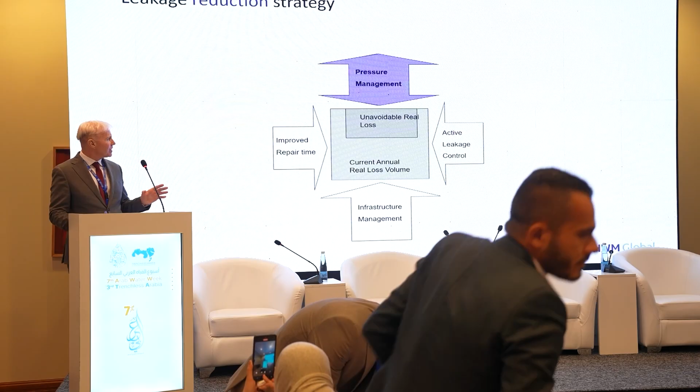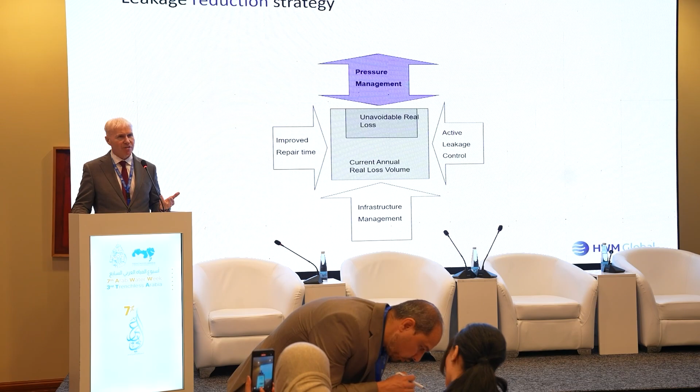I'd like to start with this slide about reducing losses in the network. We have 4 key components. Let's start with active leakage control. You have active and passive leakage control. Passive leakage control refers to customer complaints, say I have a leak outside my house, a burst pipe, visible leaks. When we talk about active leakage control, many leaks are invisible, so they don't come to the surface.

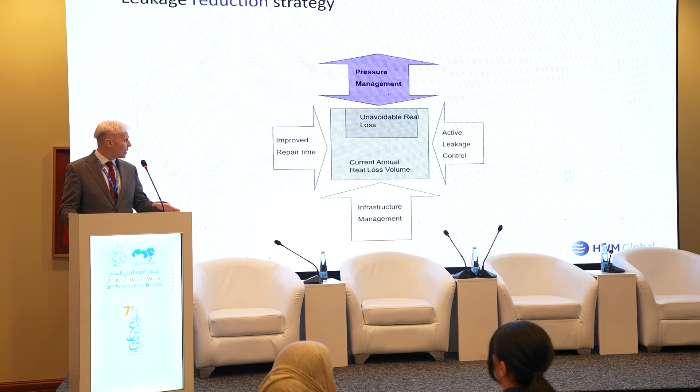You need to have good trained technicians with good technology actively looking for leakage in the network. And then, directly linked to this, is the repair of the leak. Make sure the workmanship of the repair is done well and on time, ideally within 48 hours. The whole buzzword in the leakage market today is trying to reduce the run time of the leak. The earlier we find the leak, the more water we will save.

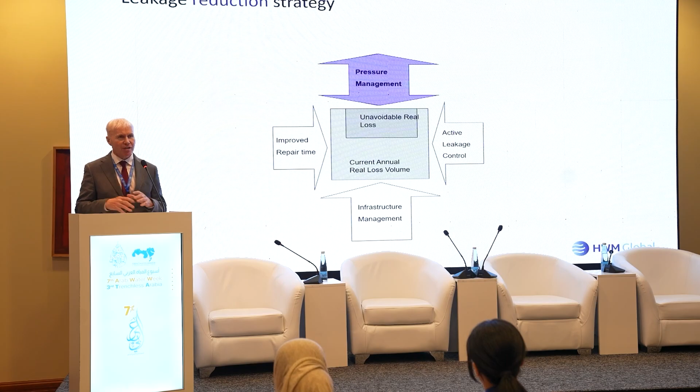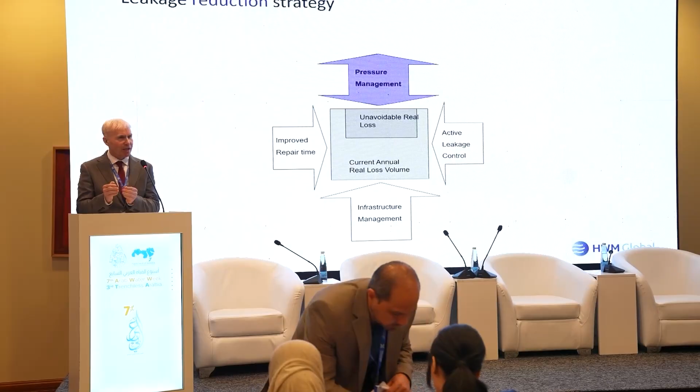Then we have infrastructure management. Obviously replacing the pipe, rehabilitation, is very expensive to do. But there may be certain parts of Amman, for example, where you're always finding leakages. So it may make sense to replace certain sections of the pipe, because it's always giving you headache with leakage. So this is something you can consider.

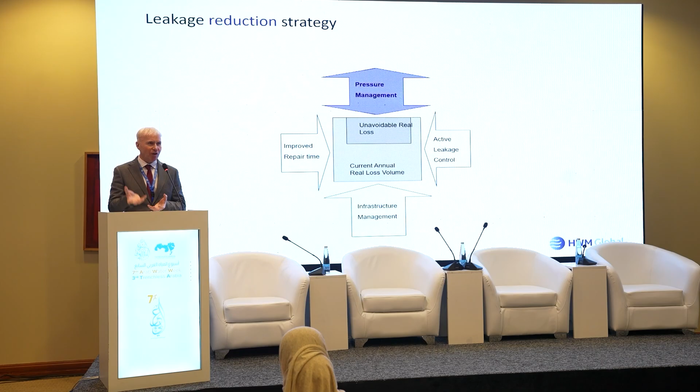Last one, pressure management. If you have a system, normally the relationship between flow and pressure is inverse. So when people are using the water in a 24-hour supply network, the pressure will drop. And at night time, when the flow drops, the pressure will increase. When you have leaks in the system, as the pressure increases, your volume of leakage will increase. So this is exactly what we don't want. We have some technologies which can help avoid this situation.

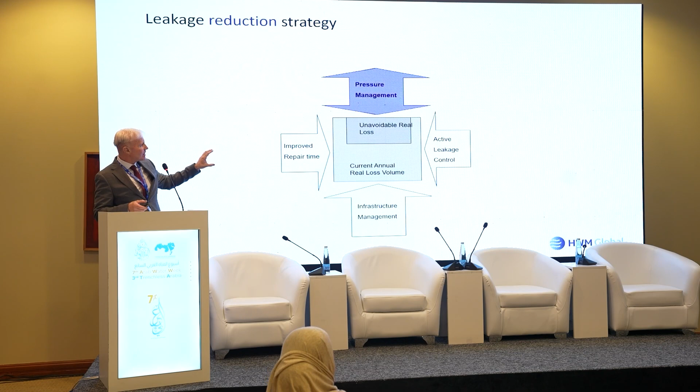But if we spend time or effort in any of these four components, we will reduce the annual loss of leakage in any system.

Typically, the technology that I'll be speaking about today can work in open networks, meaning without district meter areas. However, if you do have district meter areas or zones - we call them building blocks or smaller areas, typically between 1,000 to 5,000 properties - it enables the end customer to monitor each of the DMAs individually and then focus on the district meter areas which are giving you the most headache with regards to leakage.

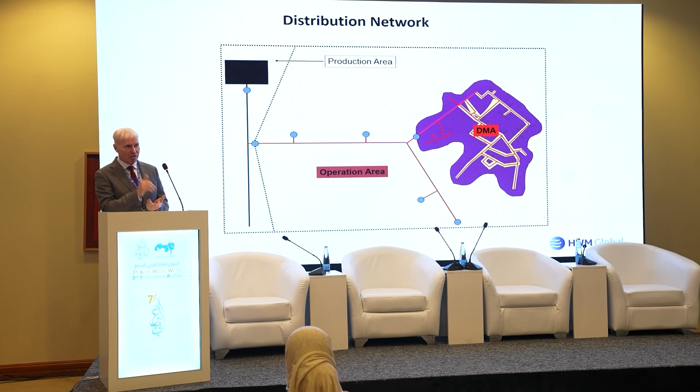So what we need to do next is monitor the behavior of this zone. And we do this by connecting data loggers - telemetry data loggers for pressure and flow - to the bulk meter at the inlet. This will give you a profile.

It looks something like this - this is like a 24-hour supply network. It looked very different in an intermittent supply network, but typically there's high demand in the morning, the flow drops off, and then at night time, you can deduct the factory usage. So the rest, the night flow which is currently always running in the background, is your leakage. So if you have 100 DMAs, and then you look at maybe 10 of the DMAs with the highest night flows - these are the ones you need to work in.

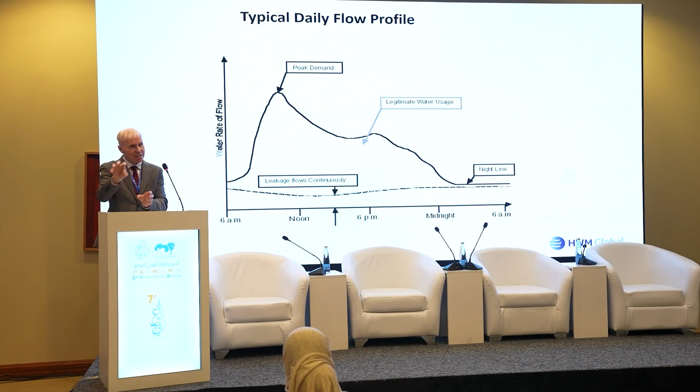So at least it's giving you critical information on where to start. You're not working blind.

We call it a 5-step strategy for finding leakages in the network. Create the DMA - which I believe in Jordan they're quite advanced, many cities are advanced in this step, so that's a good start. Then identify the leakage area based on your DMAs. Then we need to find the leaks in the network. Confirm the leak, and then repair.

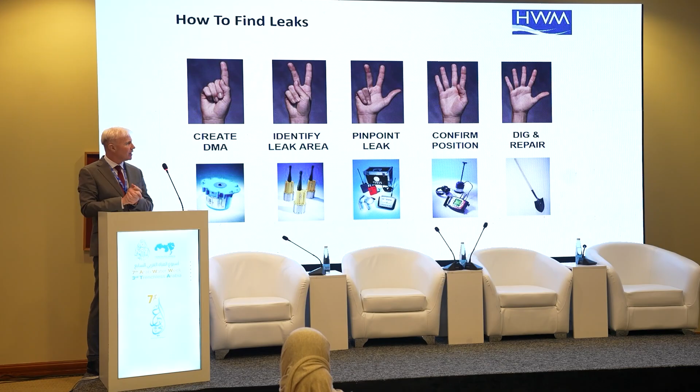Most of the technology that I'll be talking about for leak detection today is acoustic technology. So once the dig and repair happens - the final stage - it's important that we revisit the site, because if you eliminate this leak, the technology is always picking up the leak with the loudest intensity. But there may be a second leakage on that pipe.

So you always need to revisit that section just to double check that you don't have a second leak. The second leak will actually be larger in volume because it is quieter than the smaller leak - it's based on sound, yeah.

So having permanent deployment of technology, of sensors, helps you with finding leaks and reducing the runtime of the leak very quickly - finding the leaks when they're very young.

So let me just take you through some of the technologies that we have. For the DMAs, for the monitoring, we have a range of telemetry data loggers. We have portable loggers, but you have to go to site, program the logger, and download the data maybe in 3-4 months, so you could be missing critical information. The market has moved to more telemetry kind of online systems that send data 2 times per day, with a 5-year battery life.

These loggers can be installed in chambers, IP68 compliant, so that means if there's a flood in the chamber, the logger is protected and can still send data. And then you have alarm thresholds in the software end.

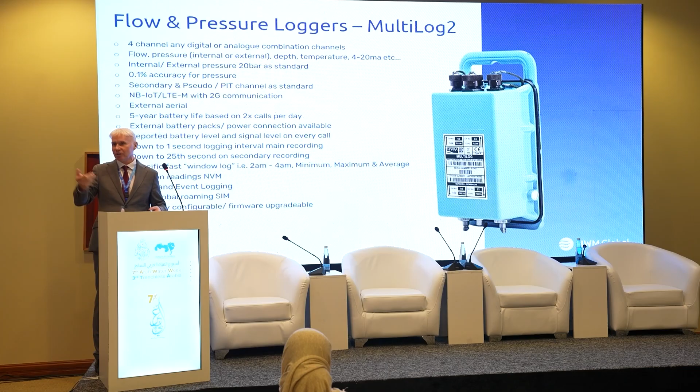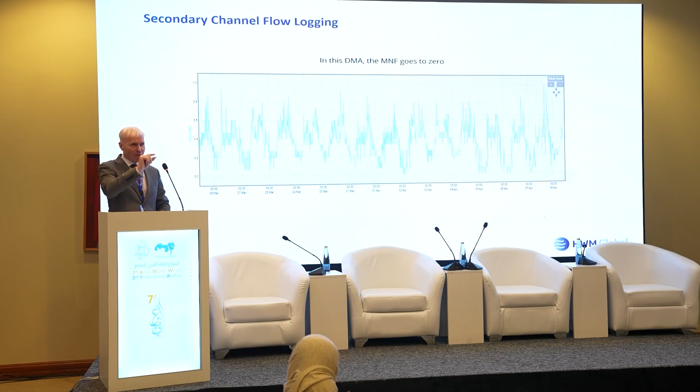I will send my leakage detection people to the site to go find some of the leaks. But we switched on the fast channel logging, and we established in the same area, same location, same graph, but faster sampling, we noticed that some of the flow readings hit 0. So by definition, if the flow ever hits 0 during a sample period, you can never have any leakage, because the leakage is always running in the background. So you would have sent technicians to site, but by switching on the fast secondary channel logging, you then can discard this site as not necessary.

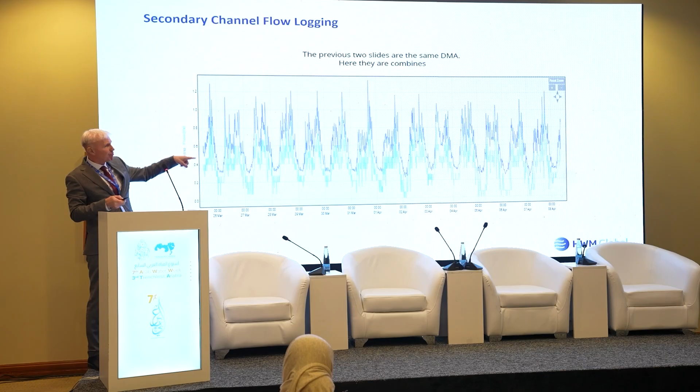So this is just superimposed on the same graph. You have the average, and then you have the more instantaneous reading.

So that's useful. Also in the logger for pressure transients, which we call water hammer, can happen very close to like a pumping station. So they happen very quickly, and a standard pressure logger will not pick up these water hammers. So you need very fast sampling, which typically can be 25 samples a second or 100 samples a second.

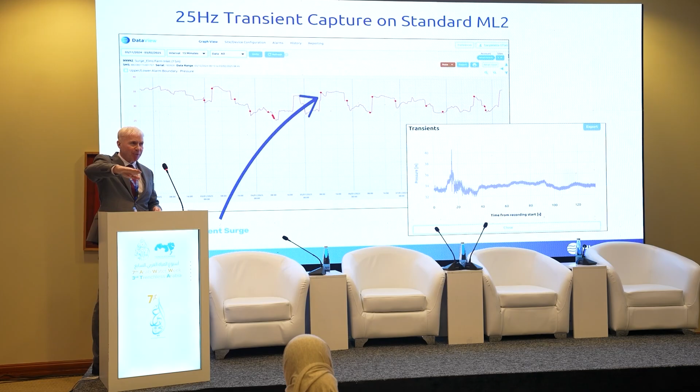Then you will see these spikes here, which can do huge damage to the pipes, can burst the pipes, but you don't know they're there. So you put the logger there, you switch on the transient logging, and then you can maybe reduce the speed of the pump to make sure these water hammer events are reduced.

We have a hosting platform which can be installed locally on the local server or cloud. So this is available for all our suite of products, for leak detection, for data loggers, and for pressure management. So once you install the technology, we call it fit and forget technology. That means that any changes you want to make to the logging or recording time, you can do it remotely. So you don't have to send people back to site, because it's using basically 4G or NB-IoT technology, and the communication is two-way.

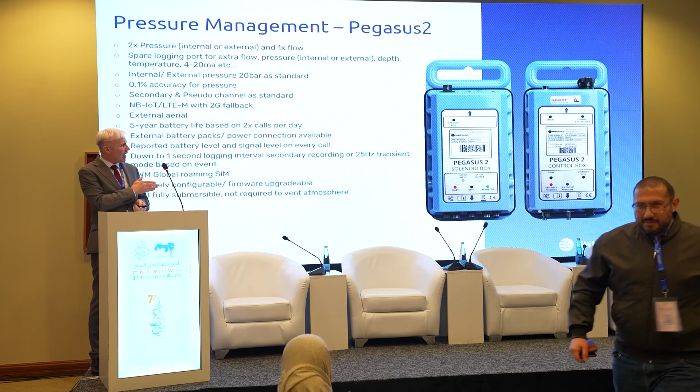So pressure management, as I explained, has an immediate impact on the volume of leakage in your system. Our pressure controllers work with existing pressure reducing valves which are installed in the network. So the advantage of this product: 5-year battery life, autonomous, 4G technology, 0.1% pressure transducers for accuracy, and again, it's for control of the PRV.

So here's a typical installation. The pressure reducing valve is installed because the customer is concerned about high pressures, so they install the PRV. The advantage is to reduce the pressure for this PMZ, for this pressure zone. But what you have to do, you see the pilots, they have to mechanically fit the pilot and the screw, and they have to fit a setting that satisfies maximum demand, which is during the day.

But what happens at night when the flow drops off? The setting of the PRV downstream is the same, so the pressure will still be high. Less than before the installation of the PRV, but still more than is required.

So this is where we come in as a manufacturer of the pressure reducing controller, and we use basically a hydraulic actuator which works in conjunction with the existing pressure reducing valve pilot, all brands of PRVs. So we are generic, we will work with any. We basically have our hydraulic actuator, which is the same thread size as the pilot. We set maximum and minimum pressure, so it can never go beyond these 2 points.

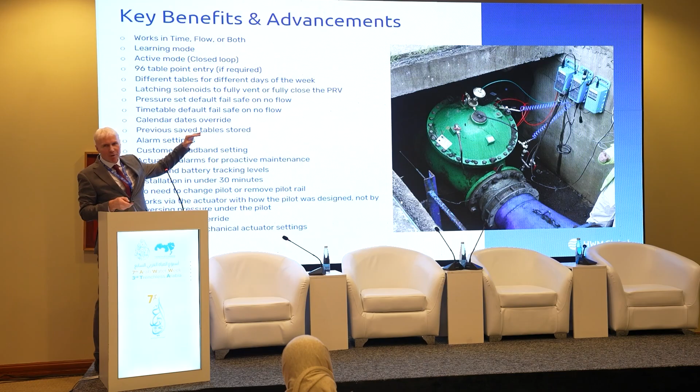So everything is battery operated, all IP68, so no problem if the chamber is flooded. The only thing that needs to be above the water is the GSM antenna. If this GSM antenna is below water, then maybe it will not send the data. But if for one day it misses the data, it will send the data the next day. It also has a backup table in the controller which will automatically back up the data and control the valve in case of non-communication.

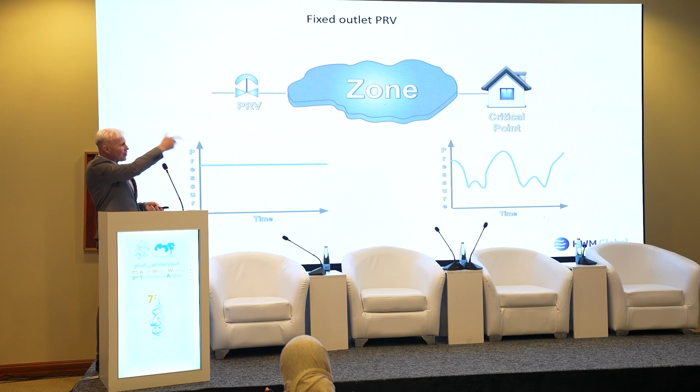So this is the typical installation on any PRV, and this is our standard PRV installation. You have standard fixed outlet pressure, and then your critical point is changing. So at night time your pressure will be high, which will increase the volume of leakage. We want to change this behavior, so we install our controller at the PRV, and we do the opposite. We control the valve, and now we have a very low minimum pressure at the critical point. This makes sure that this paying customer is always getting the minimum required pressure 24/7.

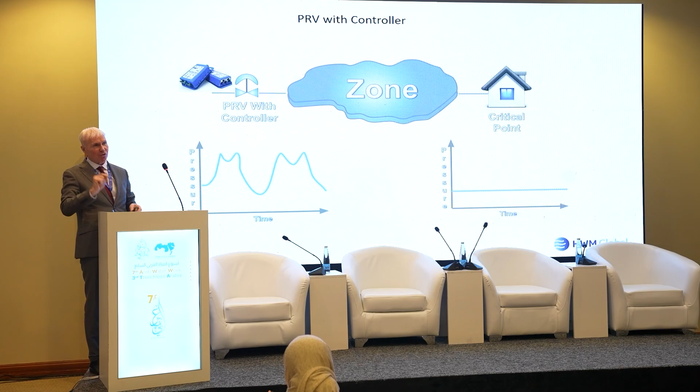The advantages of pressure management: apart from saving water and reducing the volume of leakage, the pipes will last longer because there's less stress on the pipe. The pressure is a smoother system, so less changes, less variations, so the pipes will last longer. Better customer service, and the volume of leakage lost will be reduced. Your leakage is still running, but the volume of leakage is less.

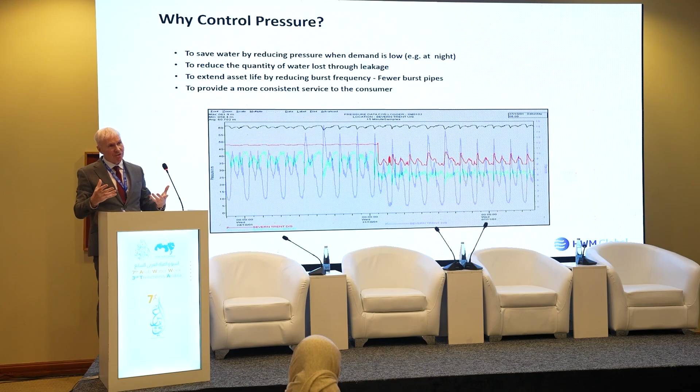But the leaks are still running. So now we have to find the leaks. How do we find the leaks?

I think it's time for my voice to have a bit of water. Can everyone still hear me okay?

So leak detection, we're the world leader in this field, finding leaks. We need to know where to go. This is the final stage, the leak ground microphone, this is the final confirmation stage. It comes with headphones, elephant foot filters. Depending on the pipe material you're working with, if you're working on a plastic pipe it has plastic filter settings, metallic pipe has metallic filter settings. It also comes complete with an app.

You can load the app on the phone and pair it with the central unit. The advantage of that is you can send audio files from the leak site. If you have, for example, a leak detection technician who's new to the job, he's had a few weeks of training and he's not sure where the leak is, whether it's here, this location, or here, he can take a file and send it via the app, via email, or if they have the software installed on the server, the leakage management guru technician can listen from the office and give his recommendation of where the leak is and feed back to the technician.

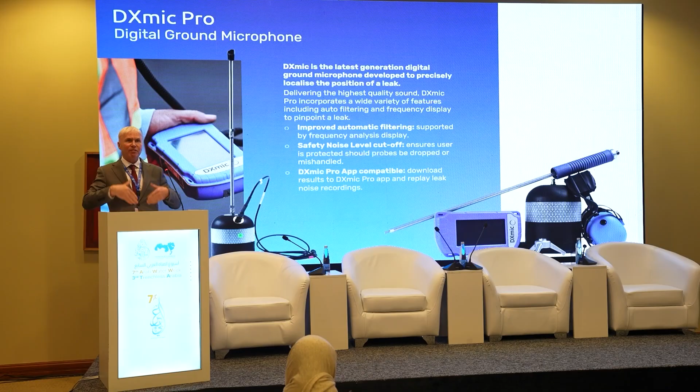So it builds up a profile, and also tells you how many leaks you've been finding in a certain period of time. So it may say you found 12 leaks on the same section of pipe. I think it's time to replace the pipe, because you have this documentation and this history, okay? So that's the confirmation.

Correlation is to pinpoint. So this technology goes onto valve fittings. Typically every 250 meters you put a sensor, you put in the diameter, the distance between the two, the material, and it does a correlation. Basically, it's picking up the time difference of the leak arriving at one sensor compared to the next. So it's using time delay.

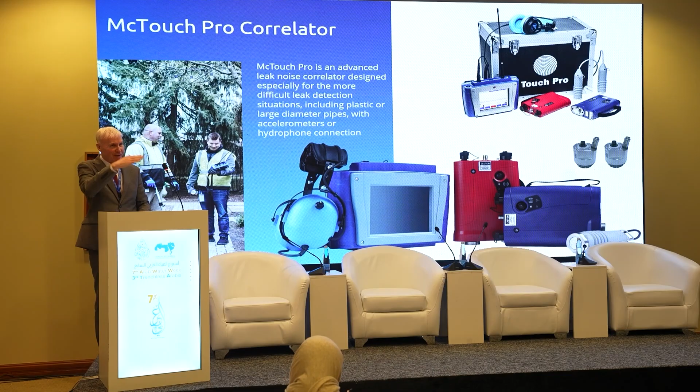And then it will give you a position of the leak, which will basically be a graph with a peak in a fixed position, because believe it or not, the leak doesn't repair itself and it never moves, okay? It's always there. So if it keeps moving, then it's consumption. It's not leakage. The leakage always stays in the same place.

So let's move on to the acoustic technology, because this has really changed the market for water utilities, okay? Because this can work in open networks, but also in hotspot DMAs. We won the Queen's Award for Innovation back in 2017, which is a prestigious award for manufacturers.

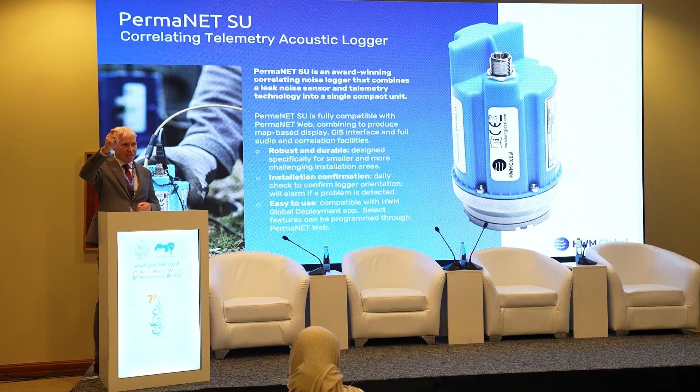So basically inside the logger, it has a magnet, a SIM card, a leak sensor and antenna. It will log between 2 and 4, and then at 4 a.m. finishes recording, and it's listening for consistency of noise, constant noise over time, okay? And then it will also make a 15-second recording and send this data to the online server. And then you will get a list of priorities of where your leakage is.

Here, I don't know if it will work, but if you have a sound file, you can listen and you can hear a clear leak noise.

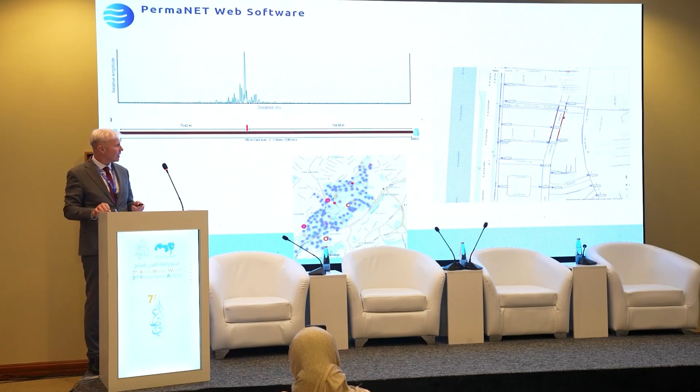How long do I have, like 5 minutes? Probably this. 4. Okay, let's call it 4.

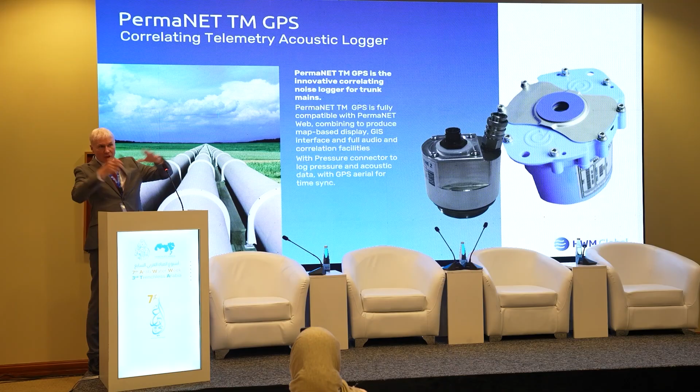So there's a typical leak peak, okay? Then we have large transmission lines, so larger diameter mains. We pick up noise traveling through the water. So the first technology was across the pipe. This one is in the water column for large transmission mains or plastic pipes.

We've also introduced AI, artificial intelligence, with our noise sensors, using a spectrogram. This really reduces the number of false positives, because leakage is not the only constant noise. You have other noises like PRV noise, pumps, transformers, and we can reduce the number of false positives now by having AI inbuilt.

Final few slides now, just on wastewater networks, in case anyone is involved in wastewater. There is now huge investment in wastewater networks. They're really concerned about the environment and pollution and spillages of the wastewater network. So we have a range of products, again 5-year battery operated, and they are monitoring these manholes in the sewage network. What we're trying to do is to avoid the spillage.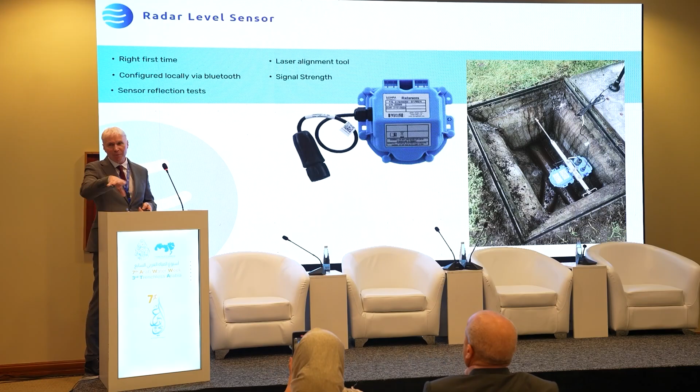UK companies are hit with huge fines for these spillages, but around the world, especially around the Gulf, they're investing heavily in this kind of technology to permanently monitor the wastewater network. Wastewater parameters, water quality, different parameters we can monitor, all in a battery operated system, 5 years.

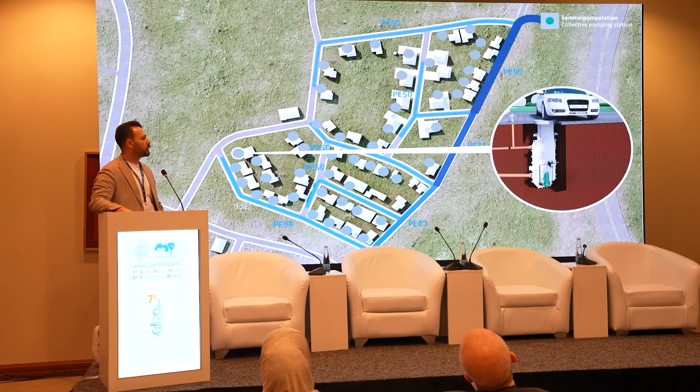But unluckily, this is not the case in all countries and situations where you have different altitudes. People are sometimes living in valleys, and the wastewater treatment is not on the same level or below. Maybe it's at higher elevations, and we have to pump it one time or in series with different pump stations. So today I will be giving you a quick overview about us, and the application of the Wilo solid separation system, which is used in the collection and transport of wastewater. What is it exactly? Functionality, configuration, the range, and your advantages.

So to start about Wilo. Wilo is a German company and one of the world's leading premium providers of pumps and pump systems for building services, water management, and industrial applications. We move water in an innovative, efficient, and climate-friendly manner. We work hand in hand with our customers to really understand their pain points, work on each specific case, and provide them a custom-tailored solution which meets their requirements and overcomes the challenges.

So we moved from improving hydraulic efficiency, overall efficiency and reliability of the system, but now recently we are more in a digital approach, where those pumps are smart enough to monitor themselves, to protect themselves from blockages sometimes in wastewater, and even control other pumps. It is smart and digital.

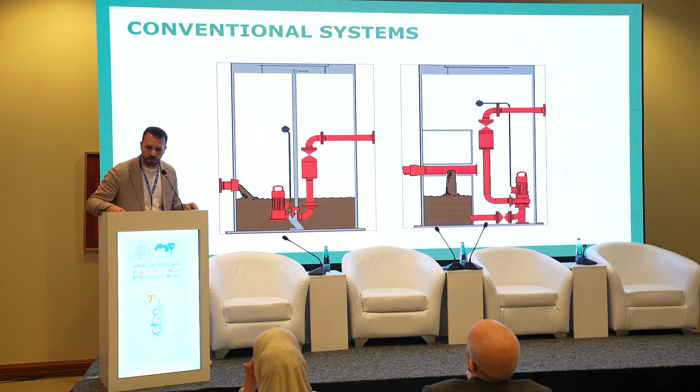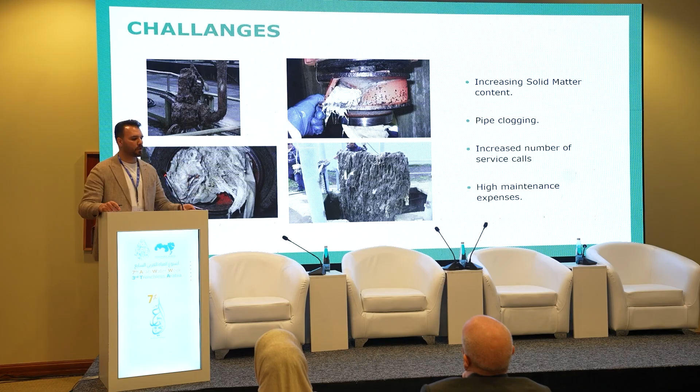But usually you find lots of challenges in this application that you don't expect, especially in the lifting station: the solid matter content inside the medium. So you can find rags, papers, diapers, everything you can imagine. And there is also increasing solid matter in the wastewater. Pipe clogging, you have an increased number of service calls and cleaning. Plus, it's not hygienic, it also smells.

So our solution, solid separation, works well. It's a complete turnkey solution. The system is plug and play, a turnkey solution for collection and disposal of the wastewater. It comes with all the fittings and valves, pumps, collection tank, control panel, to be fully in operation. So in the inlet, you have a distribution chamber.

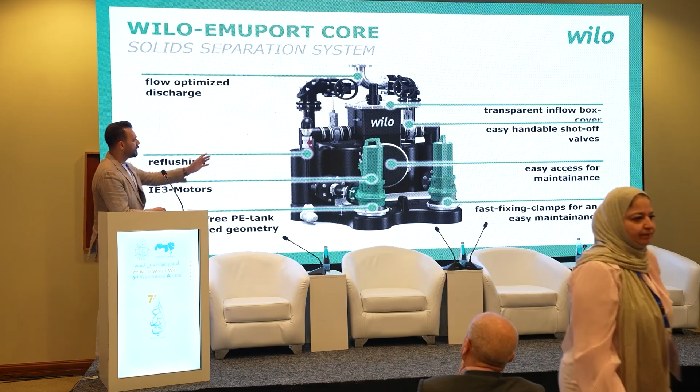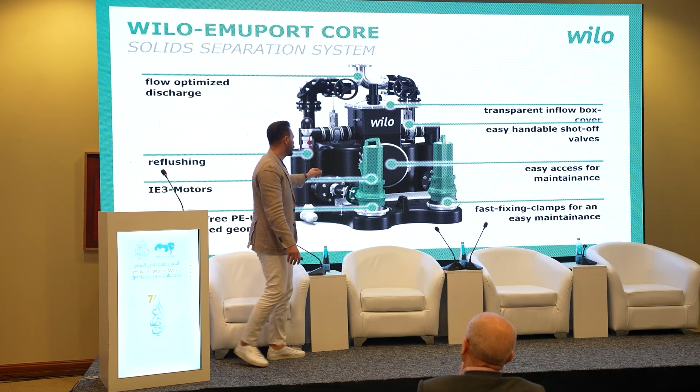This is the transparent chamber where the inflow is divided into two solid separation tanks. In these two solid separation tanks, the solids or particles will be retained inside by means of a screen. And then only screened liquid will pass through the pumps to the collection tank.

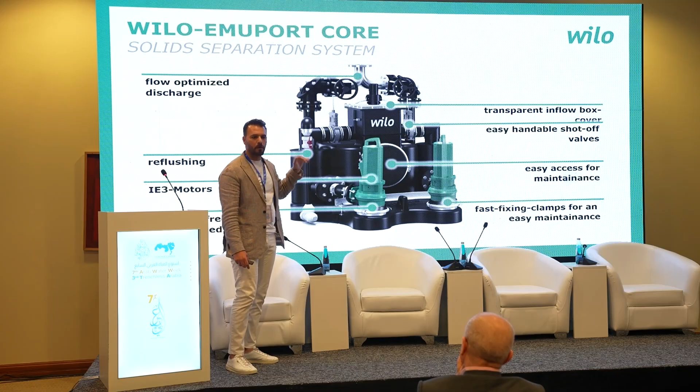And then when the tank level reaches a specific limit, the pump will start and take the screened liquid, pump it directly into the solid separation tank, and then flush all the solids retained inside directly to the discharge.

So, I'm switching around, should I point here?

So just to break it down, that one is, let's say, the demo or the small size of configuration, which can be used in residential, commercial application, and small capacity lifting stations. But we have also different configurations which I will show you. Here is a cross-sectional cut.

The inflow will come. By screen, all the solid matter will be retained in the solid separation tank. Then screened sewage will pass through the pump to the collection tank. By this, you can actually use small ball passage pumps, because the solids are not passing through the pump or even reaching the collection tank. So less sedimentation and settlement inside the tank, less cleaning of the collection tank, and less plugging for the pump.

And whenever you are able to reduce the ball passage of the pump, you can go with a different type of impellers that use, let's say, a small ball passage and enclose the flow in an efficient way. Pumps that have a smaller ball passage usually also have a high hydraulic efficiency. And this is the economical advantage, by selecting a more efficient pump to pump the sewage.

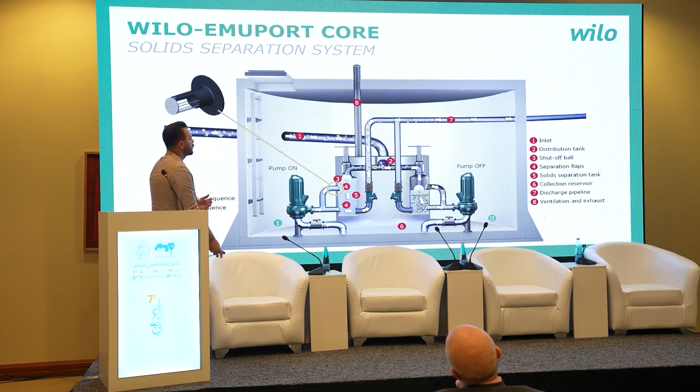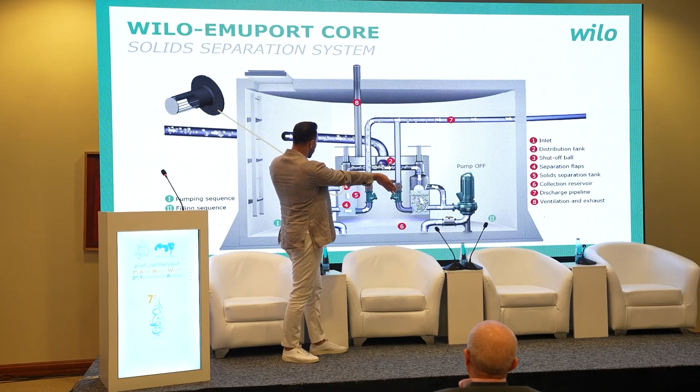And also a bigger configuration of the FG system. This is the same principle, but it is all put together. This is the inflow, number one, distribution chamber. Then the flow is distributed to two solid separation tanks. This pump is in filling process, while this pump is in pumping process. So let us imagine that now this is filling.

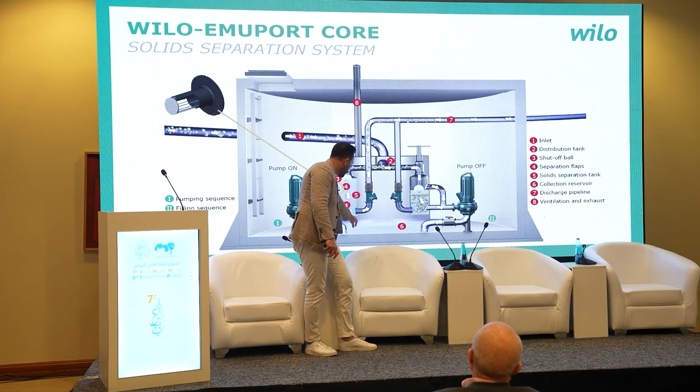The water will come from here, will reach this limit, and inside the collection tank as well. So both tanks are full of water, and two big shut-off balls will close the inflow for just milliseconds. One pump will start, let's take this one, take the screened sewage from here, flush the tank directly to the discharge, and then the second pump is intaking. This is only milliseconds, so it's a continuous inflow.

To have it in a more clear way, I have a demo video, maybe you can turn it on, to walk through it. Yeah, so the process will start from the inlet. I hope it's working.

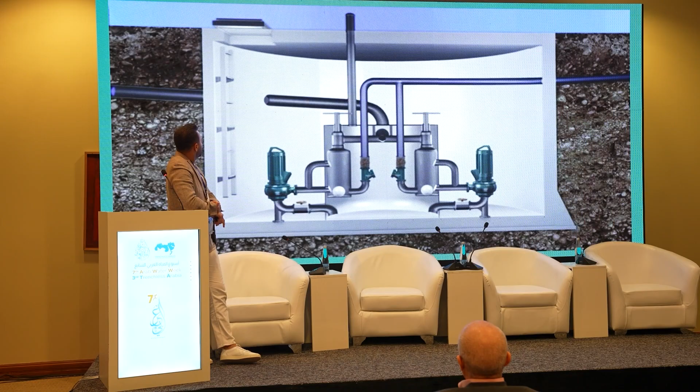Yeah, so the sewage is flowing from the inlet, distributed into two solid separation tanks, then the shut-off balls rise to close the inflow for seconds. Screened sewage is passing through the pump and filling the main collection tank. This is only a stop of milliseconds. Now the pump will sense that this is a high level, that pump will start and flush the solid separation tank directly to the discharge.

And this is continuous intake. The second pump is intaking now, filling the tank. In each filling process, the air is pressed out from the collection tank through a vent pipe. So it's also gas tight. There will be no smell in the sewage pump station whatsoever. The gas is enclosed inside and pressed out from the collection tank directly to the vent pipe, or sometimes, if it's a residential area, you can install an odor control unit for the treatment of the air.

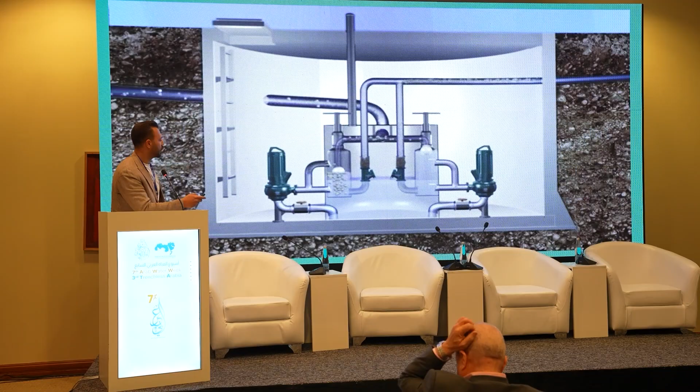So the economical advantage, as I said, you can select small ball passage, high efficiency pumps in the sewage application. Even if you have a particle size of 100 millimeter, you can use a pump with only, let's say, 80 millimeter or 50 millimeter ball passage. And then you can save more. So this is the FG design of the solid separation system.

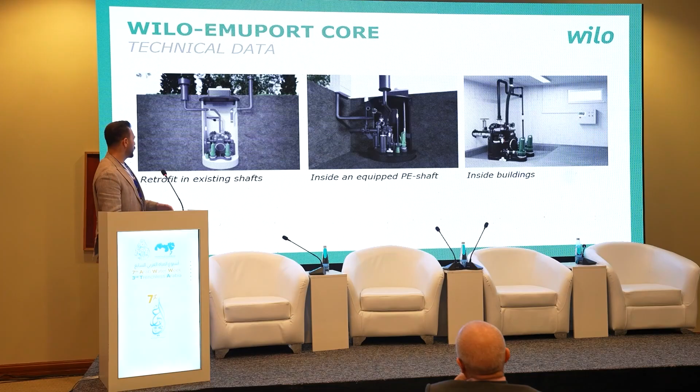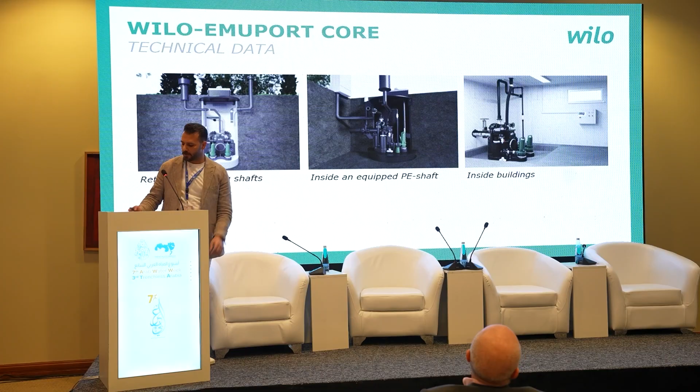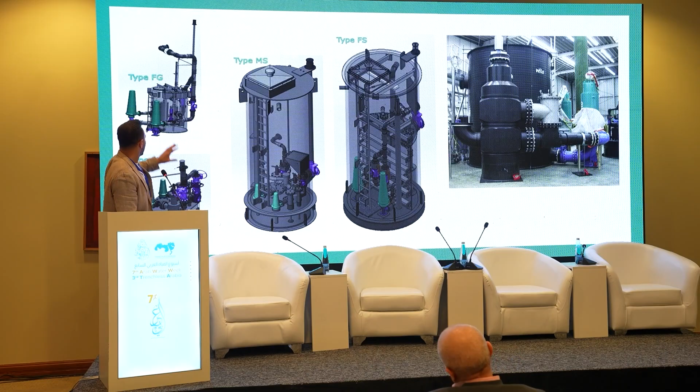Configuration and range quickly. The pumps can be installed in an existing shaft, or in a new PEHD shaft. We fabricate as well the PEHD, polyethylene high density, shafts, or inside buildings. So it looks like this in different applications, because this is quite a customized system, depending on the installation and the space available. So you have ground installation or shaft installation.

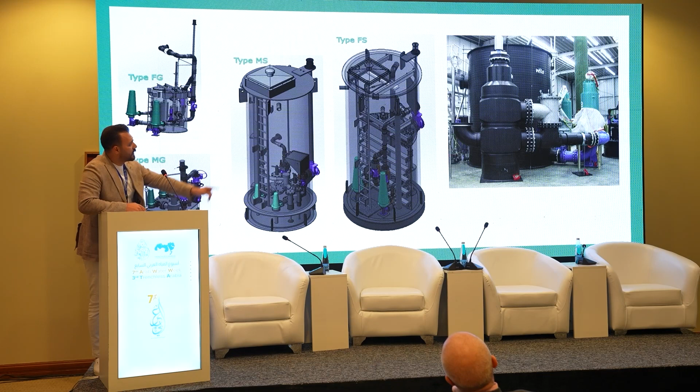It comes with all the accessories, the collection tank, the ladders. We just have to dig the hole and we can do the remaining job. And that system is actually the biggest that we have produced, of 1,200 cubic meters per hour inflow to the station.

So we usually ask for the inflow, we ask for the discharge profile of the pipe, how much is the static head, how much is the dynamic, and then we select the collection tank capacity, we select the pumps suitable for this, and we give you the design drawing to prepare your sump.

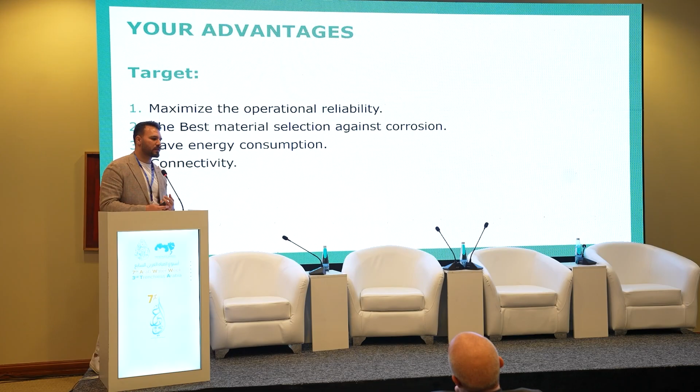So your advantages: maximize the operational reliability, and then we have the best material selection for this application, save energy consumption, and, let's say, the product connectivity and how much it is digital and can be monitored on dashboards and all.

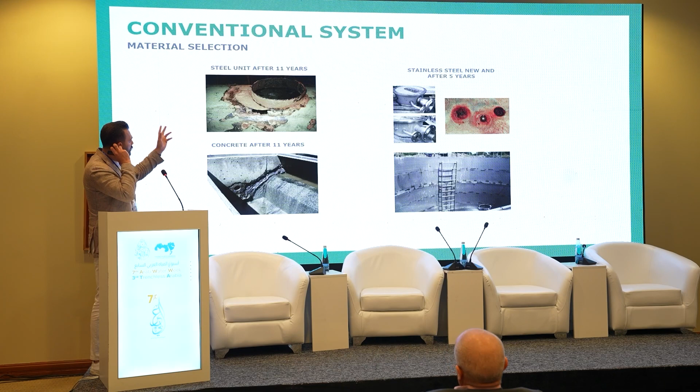So about the material for wastewater collection pump stations, you usually see concrete or stainless steel. Now you can see some pictures here of steel pipes, concrete channels, stainless steel shafts used in sewage application after a number of years, and how much this aggressive water or the sewage will impact it. Even if it's stainless steel, on the anchorage you can find some corrosion there, even if it's a bigger investment. We use high-density polyethylene.

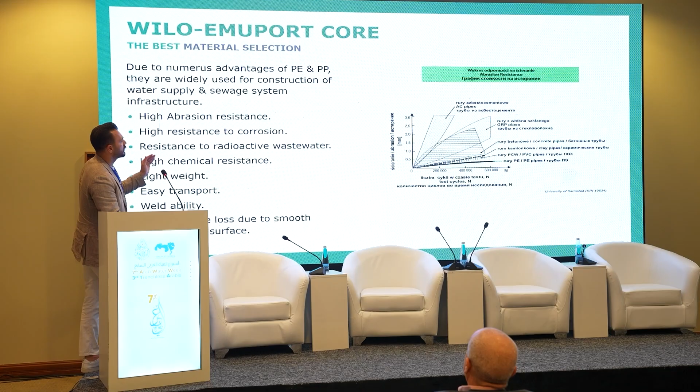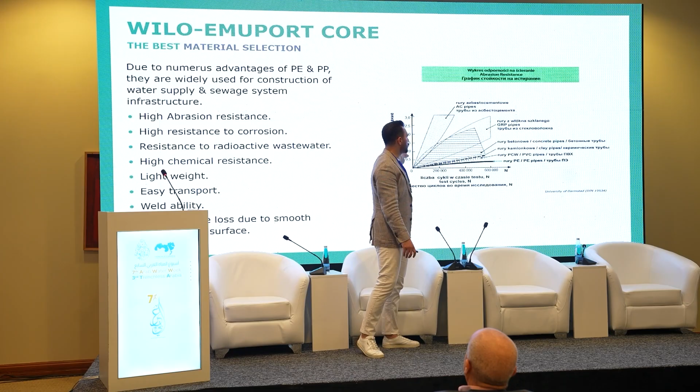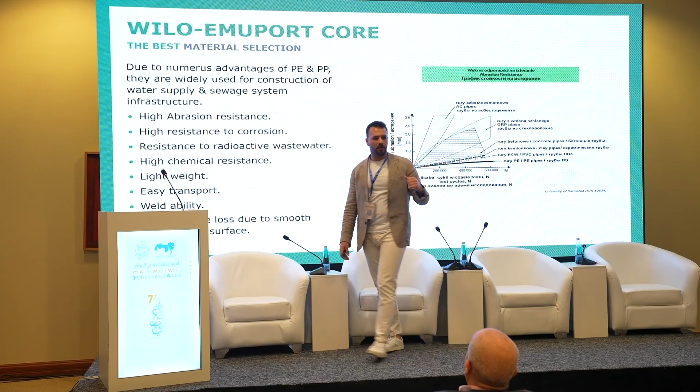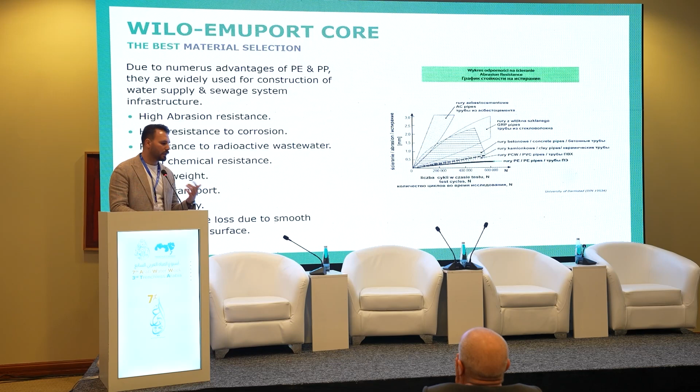This is a chart from the University of Darmstadt, where you can see different materials and the life cycle cost with, let's say, test cycles with the abrasion in millimeters, comparing AC pipes, GRP pipes, concrete pipes, clay pipes, PVC pipes, and the PE, high-density polyethylene. We can see it has the lowest abrasion in millimeters compared to the other materials. It is also very lightweight. Weldability is also possible. Wear resistance, easy transport, and many other advantages from a material point of view.

This is an example of a pump station in Lauter, Germany, where we replaced an existing pump station. We were having a 110 kilowatt pump with a 100 millimeter ball passage, because as I said, with a bigger ball passage you need a semi-open impeller or open impeller, non-clog single channel to pass these solids. When you go with a smaller ball passage, at 80 millimeters, you can go to 98 kilowatts. And we fitted a multi-channel impeller with the smallest ball passage of 50 millimeters, and then it reduced the power to 87 kilowatts.

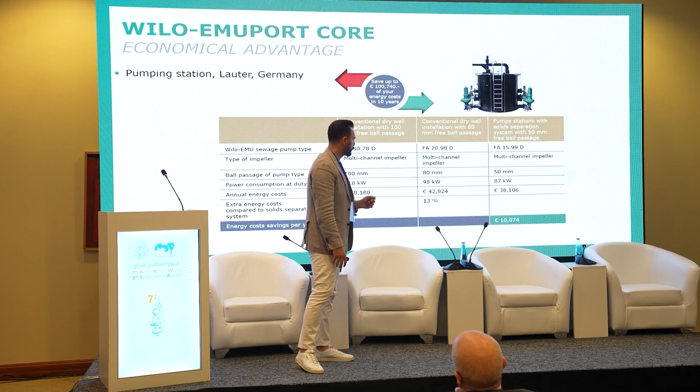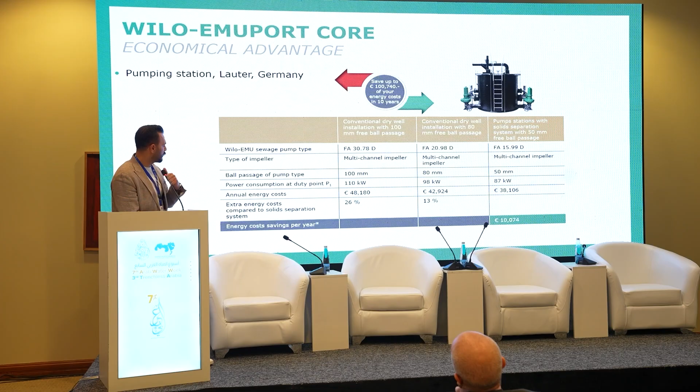So it allows us to go with a more enclosed design of the impeller because the solids will not pass through. And this is the calculation of a 10 year ROI, but this is based on the energy consumption at that time. I think it's much less now because the energy rate is much higher.

Some success stories quickly in Dubai. I personally worked on this project in metro stations with RTA, Road and Transport Authority in Dubai, where they were facing, especially in the underground metro stations, a big challenge of clogging inside the pipes for the pumps. They were investing a lot in cleaning. I think the operator there was Serco, also a well-known company for operation. And this was a problem that they could not actually solve, even with macerators.

Because macerators are used sometimes in sewage to cut it into fine particles which the pump can take, but it depends on the content of the solids. So, for example, tissues, papers, rags will all accumulate inside the pump and the pipes. And after some time it creates a tissue wall, as it's called, and then it will also clog. So that solution was also explored by them.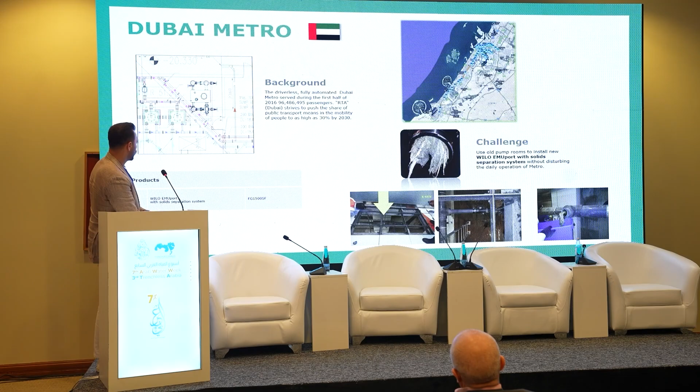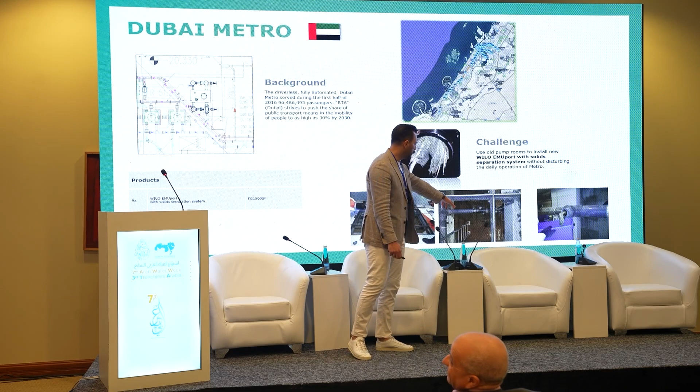Based on the available space, it was very challenging to get the pump inside the wastewater plant room because there was a very small access in the metro station down to the pump station. And you can see here some pictures from the flooding. So we customized the system with a collection tank in a rectangular shape. You can see the shape is fitting the accessibility and the space available in the pump station.

We installed a dry-installed pump there with the solids separation system, and the return was actually in less than 2 years because they were paying a lot for cleaning and shutdowns of the station, etc. This system can also be monitored by smart gateway and our smart controllers to the cloud, and you can stay connected with the dashboard or even a smartphone using the Wilo-Assistant app.

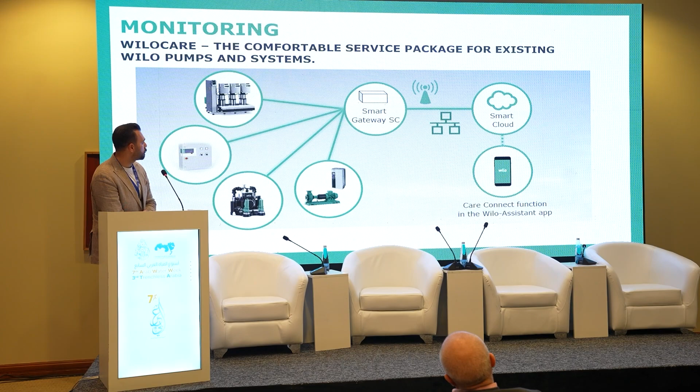So I have just one video of 30 seconds, I believe, to show you the whole process demonstrated in a nicer way than explanation. You should have put that in the beginning. Yeah, but I have like 20 minutes I should spend sharing.

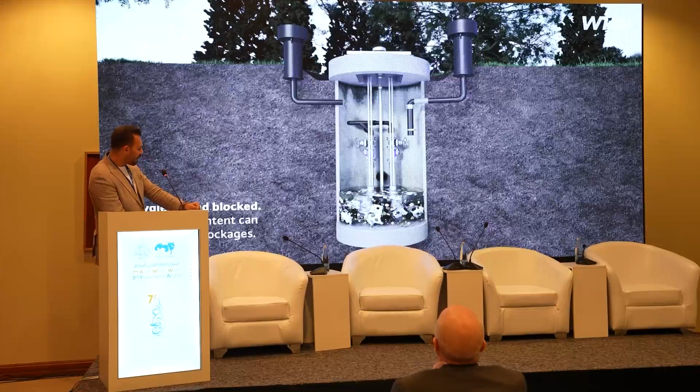Is one pump standby and the other in operation, or do the two operate together? No, they don't operate together. It's one duty, one standby. One standby, yes. So this is a replacement of an old system.

You can turn on the voice if it's possible for you. It's more interesting. Sound.

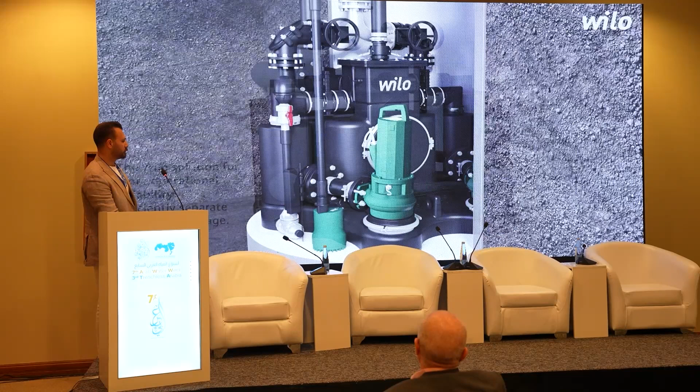System in a different configuration, the most compact version of this solution, then discharge directly.

So all the solid matter is retained in the tank, and then into the discharge directly without going through the pump or the main collection tank.

And then you have a very nice and clean wastewater collection and pumping station. As I said, also odor control unit is there, activated carbon filters can be on the vent pipe or the air contained in the collection tank. And that is all. Thank you very much for your time.